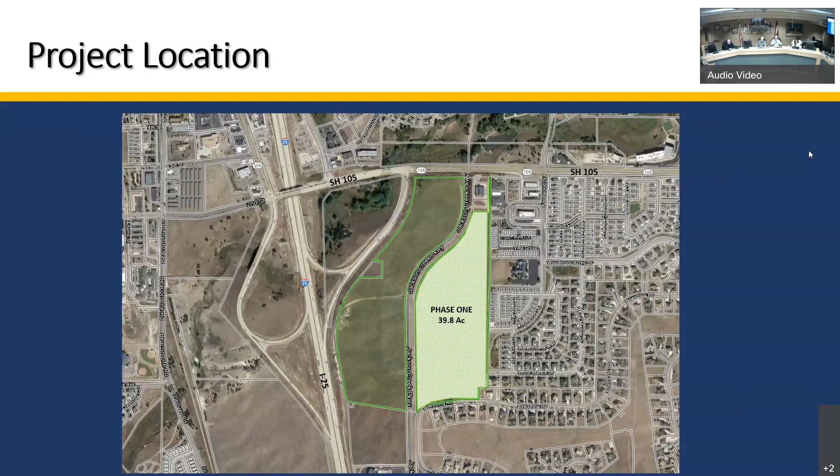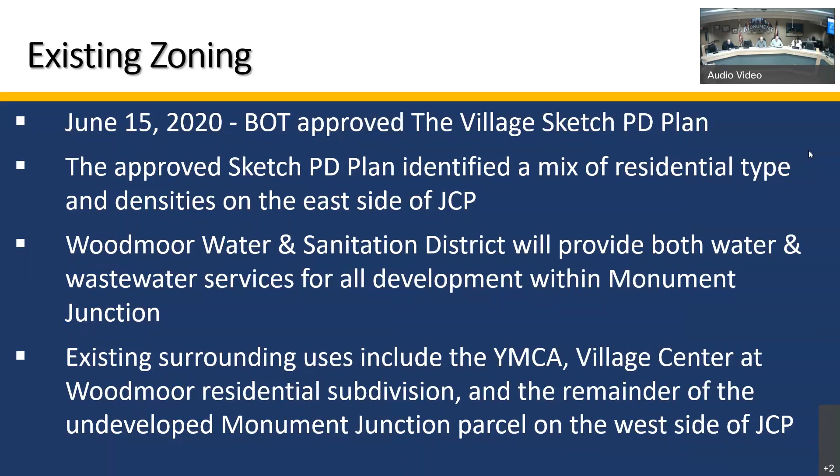On June 15th, 2020, the Board of Trustees approved the Village Sketch PD Plan, which is now Monument Junction. The approved Sketch PD Plan identified a mix of residential types and densities on the east side of Jackson Creek Parkway. Woodmoor Water and Sanitation District will provide both water and wastewater services for all development within Monument Junction. Existing surrounding uses include the YMCA, Village Center at Woodmoor Residential Subdivision, and the remainder of the undeveloped Monument Junction parcel on the west side of Jackson Creek Parkway.

This preliminary final PUD plan consists of 204 residential units. There will be 137 single-family detached lots: in Phase A, Res 1, 12 units; Phase A, Res 2, 46 units; and Phase B, Res 4, 79 units.

These units will be 4-square type homes with shared driveways. Each homeowner will be required to submit a driveway easement agreement to the town. There will also be 67 single-family attached lots in a duplex-type style, for a total of 204 residences.

The applicant provided more park space than the 2.7 acres proposed in the approved sketch plan. They are providing a 3-acre park, 4.4 acres of open space, and 0.95 miles of linear trails.

Residential building heights will be 35 feet. The site is 39.837 acres in size, and there will be an on-site detention pond. Lewis Palmer School District requested fees in lieu rather than land dedication for this project.

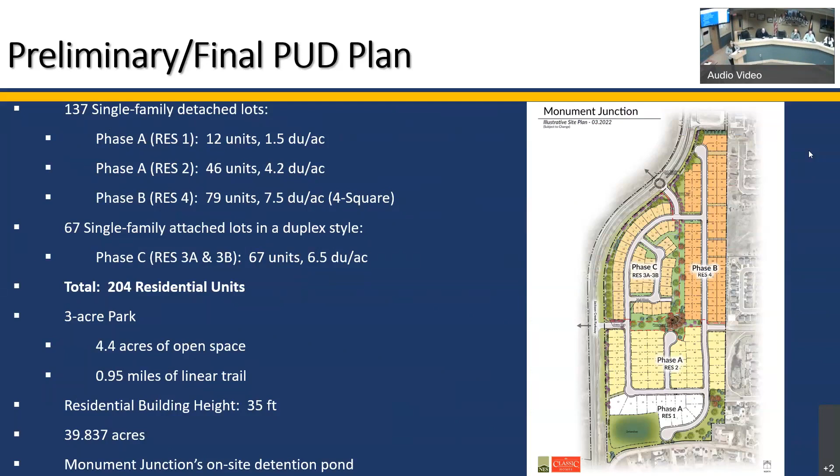Classic Homes will be responsible for the proposed road improvements from Slopeside Street to the State Highway 105 intersection. They will also be submitting a public improvement agreement as surety to the town, which will include the proposed road improvements. The road improvements will be phased.

There will be 3 access points for this project. The first is the required Norwood Drive connection, proposed in the sketch plan. The second access point is Fat Tire Drive, which will be a 2-lane approach allowing a left turn lane and a shared through and right turn lane.

The third access point will be a full movement intersection at Slopeside Street, also a 2-lane approach allowing left turn and shared through and right turn lanes. The town, the applicant, the county, CDOT, and FHU, our design consultant, are all working together on the improvements at the 105 Jackson Creek Parkway intersection.

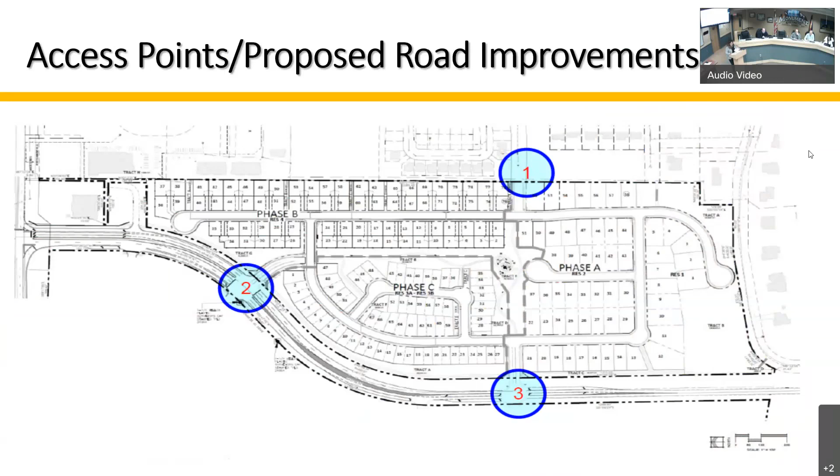Monument Junction Phase 1 is substantially compliant with the town's comprehensive plan and ensures that views, vistas, dark skies, environmentally sensitive areas, and open lands are integrated into the new development. It allows for a wider array of land use types to meet changing community needs, with a variety of residential density types and lot sizes.

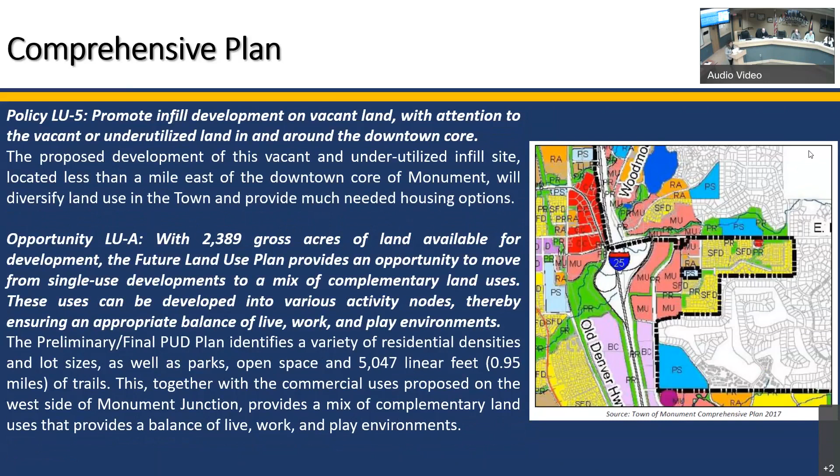It promotes infill development on vacant land. It would diversify land use in the town and provide much needed housing options. It provides a balance of live, work, and play environments, and a connection to parks, open space, and trails.

There will be a centralized park area that will include a play area, a looped trail, and seating. Part of the trail will also connect to Trinity Lutheran Church, where they have a proposed playground—they had a ribbon cutting a few weeks ago for it. It will be for all residents within the town of Monument to enjoy.

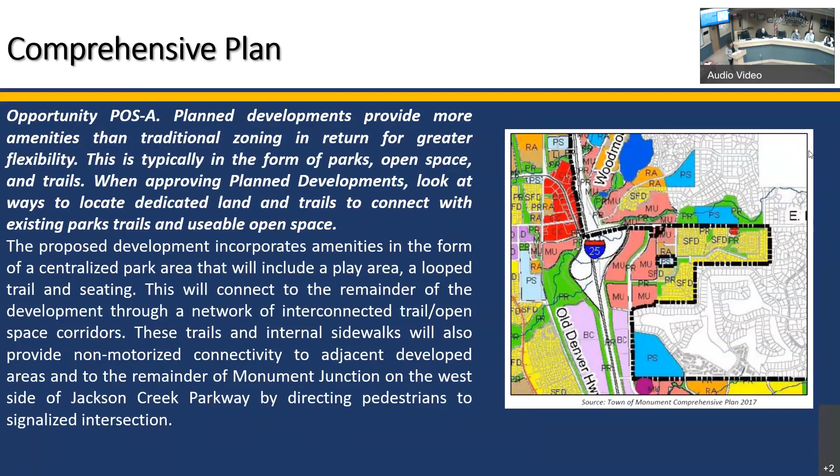The Planning Commission voted 6-0 to approve this project, and staff recommends approval of Monument Junction Phase 1 Preliminary Final PUD Plan, based on findings that the plan is in conformance with the review and approval criteria in the Town of Monument's Land Development Code, sections 18.03-450D and 18.03-460D.

Andrea Barlow with NES is here to present the applicant's presentation tonight.

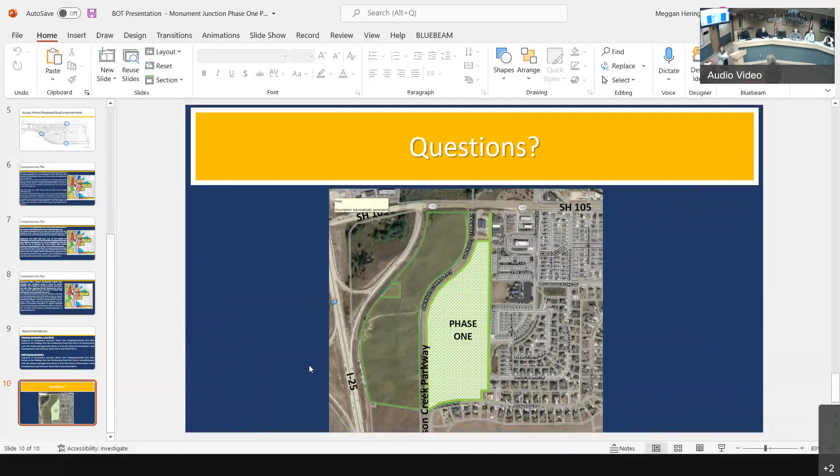Good evening, Commissioners. Andrea Barlow with NES, here representing Classic Homes, who are the developer and applicant. I'll try not to repeat Debbie's information.

I think you've got an idea of the location, just a bit of description of some of the land uses to the east. Particularly, we have Village Estates at the northeast corner of the property, and Monument Villas to the east, as well as the church, then Village Center residential on the east side in the south section of the property, and Woodmoor Greens, which is in the county, on the south side. So we are just looking at the eastern portion of the Monument Junction property, east of Jackson Creek Parkway.

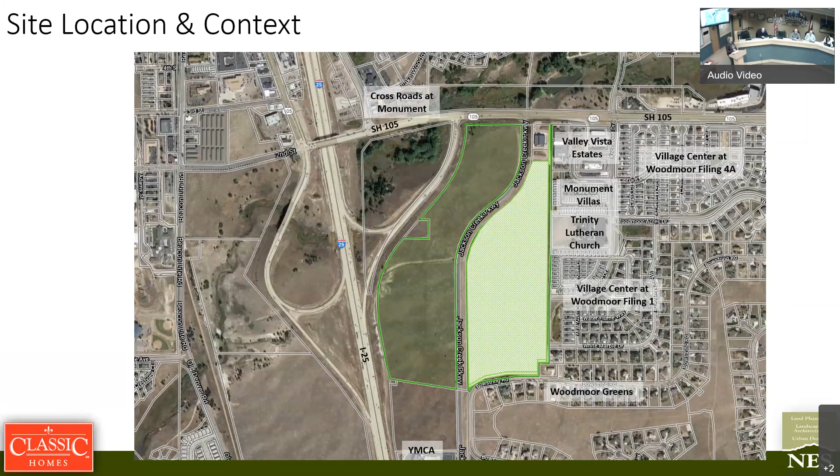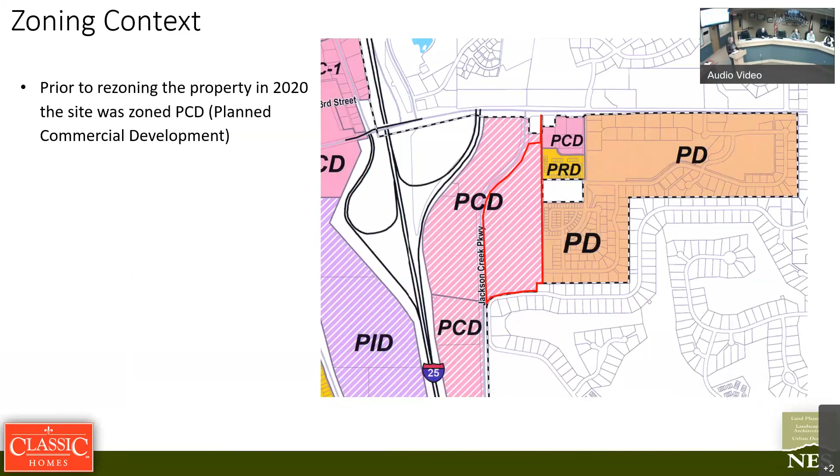Just a little bit of the past zoning: originally, this property was zoned in its entirety PCD, planned commercial development. It did come forward with rezoning in 2015 to all residential, which was denied by the town, wanting to see some commercial development retained as part of the overall development. With the recent change in the zoning code, this has been updated to a PUD—that's just a reclassification. Nothing really changes other than that.

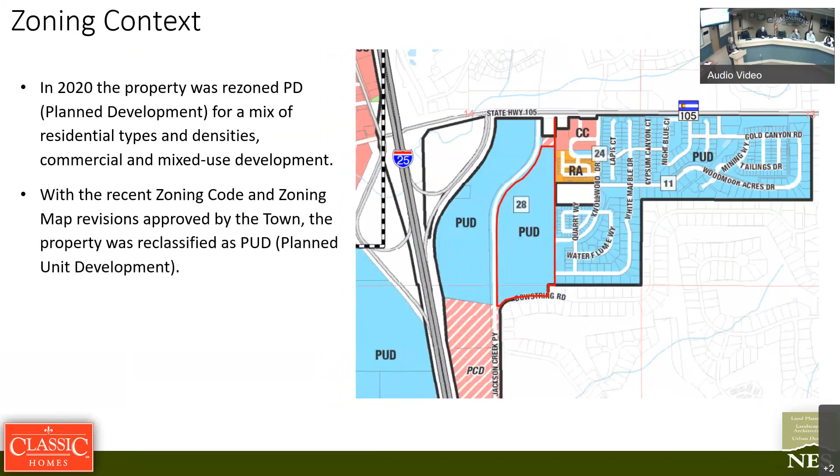The approved sketch plan, just talk a little bit about that.

Again, on the east side, which is the area we're focusing on, it identified a mix of different types of single family residential, detached, attached, or townhomes as possibilities, especially in that northern section. A central park area is there in the green. And then on the south, there was lower density, single family detached, reducing density as we went to the south, with a buffer on the south side.

I'll talk a little bit more about that. The commercial uses and multifamily uses were proposed on the west side of Jackson Creek Parkway. They are not part of this plan today, but they will be coming forward in the future. Altogether in the sketch plan, we had about 14 acres of parks, open space and trails.

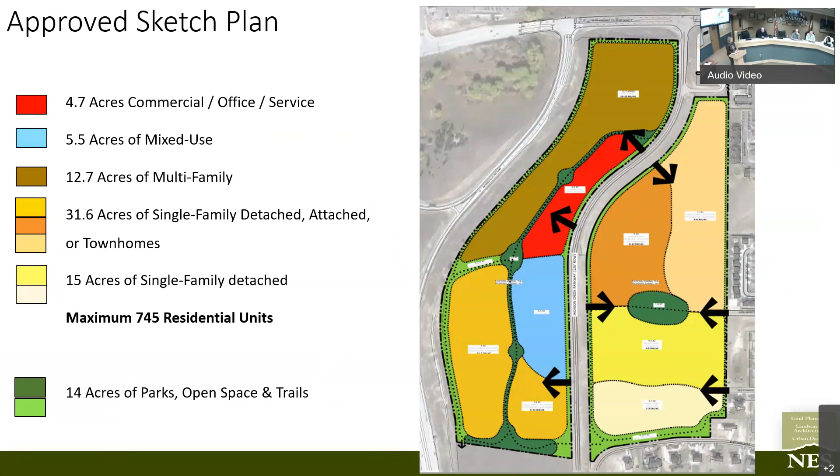So just to focus a little bit on the area that is on the east side. We have areas where, on the south side, the density was 1 to 3 units per acre, which was generally consistent with the 1.5 unit per acre density of Woodmoor Greens. And then as we move north, we gradually increased in density.

So the yellow area is 3 to 5 units per acre, again generally consistent with the village centre development to the east. And then moving forward into that lighter peachy colour area, that was 5 to 8 units per acre, and then a higher density adjacent to Jackson Creek.

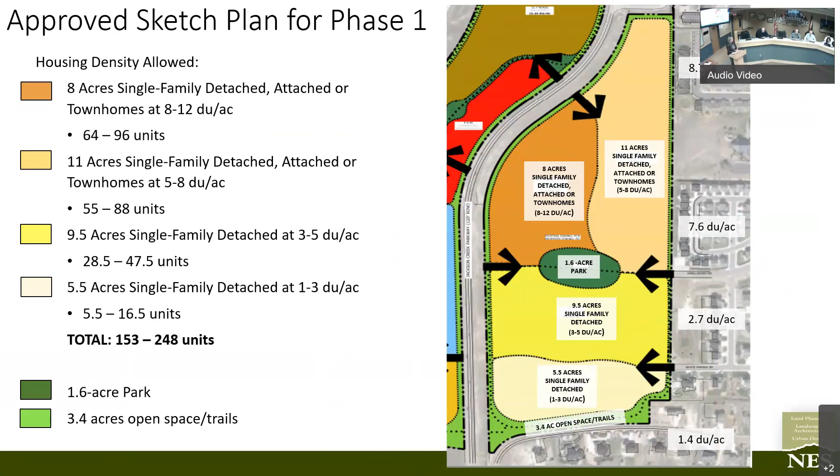In this plan on the east side, we propose a 1.6 acre park, the green area in the centre, and then 3.5 acres open space and trails around the perimeter and on the south side.

So this is the plan we have before you today. We have 3 different types of development, all residential with different densities. On the south side of Phase A, in white, is an area that is lower density at 1.5 units per acre. And then moving up into the yellow area, still part of Phase A, is 4.2 units per acre.

On the east side, we have a higher density single family detached product, coming in at about 7.5 units per acre. And then in Phase C, it's an attached product, single family attached, 2 units attached with a common wall, at 6.5 units per acre.

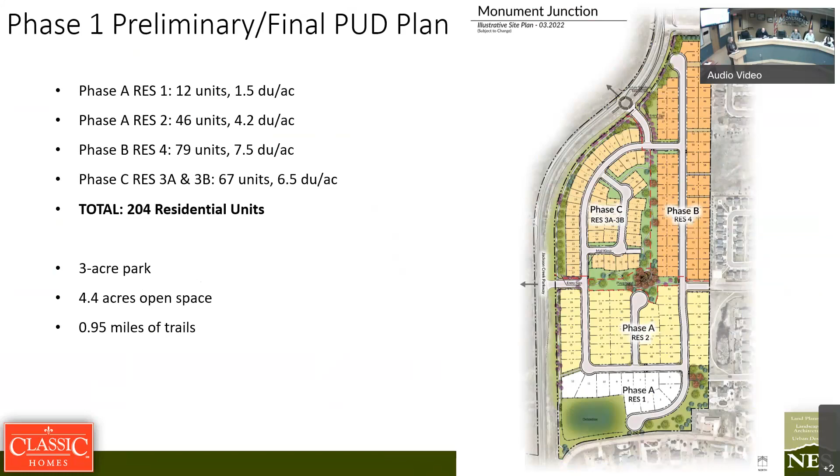A total of 204 units on this parcel, and we have a 3 acre park, centralized but elongated in the middle, between phases B and C. We also have 4.4 acres of open space and trails around the perimeter, and almost a mile of trails.

So a couple of things, looking at a comparison between what the sketch plan approved and what we're proposing today. On the south side of Phase A, we have 1.5 units per acre, as I noted, in an area that was identified as 1 to 3 units per acre. So we're right in the middle there.

Phase A, the second portion of it in yellow, we're at 4.2 units per acre, which is within the range allowed on the sketch plan. Similarly, Phase B is within the range allowed, and actually Phase C is a little less. We had a range of allowed residential units on the sketch plan from the low end of 153 up to the high end of 248. And we are coming in now with this preliminary final plan at 204 units, so right in the middle of what was allowed.

We are actually providing a lot more park space than was originally anticipated, almost double, and more open space and more trails.

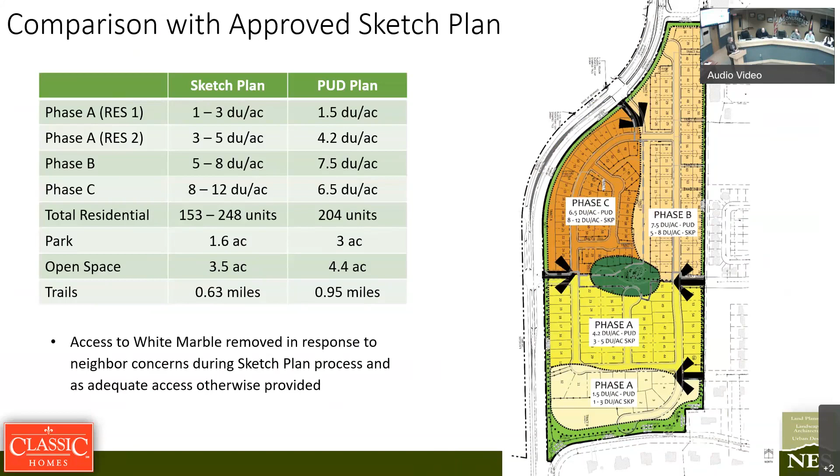That was fairly contentious with some of the neighbours in that area at the time. It is much more of a residential street, whereas Knollwood is a collector with no direct lot access off it. With reviewing the plans, we decided that not only did we not need that access to service the southern part of the development, but that it would be a better relationship for those neighbours.

So this is going to start talking about traffic a little bit here. A comparison between what was originally zoned for commercial, what the traffic would have been versus the approved sketch plan, and what we're proposing today.

For the entirety of Monument Junction, if you'd taken commercial zoning across the whole site, you'd be looking at almost 18,000 trips a day. With the approved sketch plan, that was reduced to just over 7,000, and the currently planned uses are a little more than the sketch plan anticipated, but in that ballpark—just slightly different uses now anticipated, primarily on the west side. The original commercial zoning on the east side would have been 10,700 trips a day, and we are significantly reducing that, to only just over 1,900. So traffic generated on the east side is significantly less than with that prior commercial zoning.

And that was a point we made when we rezoned the property and got the sketch plan approved last year.

So description—Debbie touched on some of these, I'm just going to go into a little more detail. First, some overarching aspects of the proposed road improvements, then more detail on what's been proposed. There's a plan to widen Jackson Creek Parkway north of Higby Road all the way to 105. This overall plan is the responsibility of the town, and the design is underway, so the town is taking responsibility for that overall design.

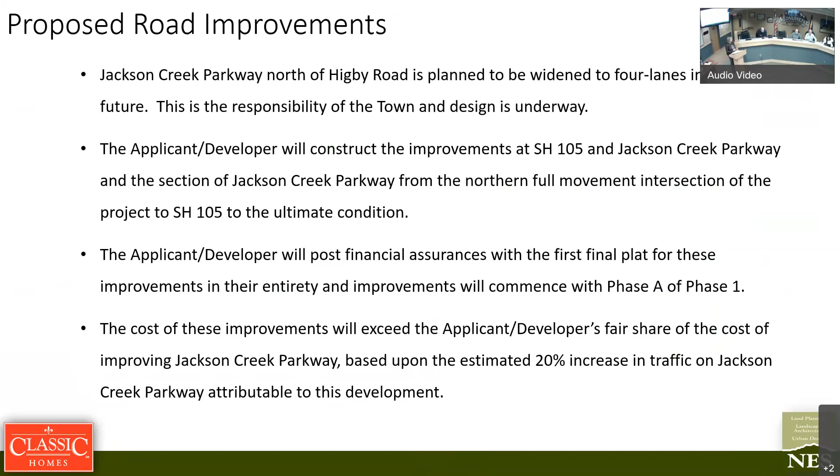So describing those improvements in a little more detail—I'm sure you're all very familiar with this intersection, so hopefully it will have some context for you.

The first improvement requested, probably the primary one from CDOT particularly, is as you go eastbound on 105 and turn south on Jackson Creek Parkway—they've asked for a deceleration lane and a free right turn at that point, so you'll be able to turn freely rather than currently being stuck behind traffic going straight on. There will be a free right turn to go south.

Also in the northbound direction, that will change to a dual northbound left turn lane—two left turn lanes going north onto 105 in a westerly direction. The right turn lane will also be extended. One of the problems now is there's a right turn lane, but it isn't long enough, so it gets blocked by traffic turning left and backs up. So we're extending all those lanes south and introducing a dual northbound left turn, which will significantly improve traffic flow in that direction.

In addition, we'll be providing a southbound right turn deceleration into the first access point on the west side of the project. Then on 105, the westbound approach at the signal will be restriped to accommodate dual westbound left turn lanes, so as you're coming along 105 to Jackson Creek Parkway turning south/left, there will now be two left turn lanes to accommodate those turning movements.

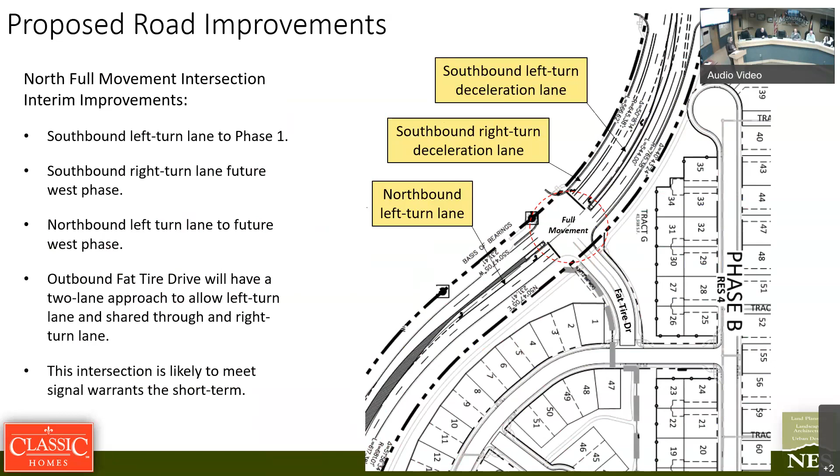So all these improvements will be interim until the road is widened in that southern section. So that's all the traffic improvements.

Moving on to the comprehensive plan, Debbie addressed this in detail. I just want to emphasize that the site is identified as mixed use on the comprehensive plan future land use map. The sketch plan that was approved was found to be consistent with that designation and various other policies in the comprehensive plan, which encourage mixed use and a variety of land uses. We do have the mix not only of different types of residential densities, but also commercial uses, as well as some more civic uses proposed.

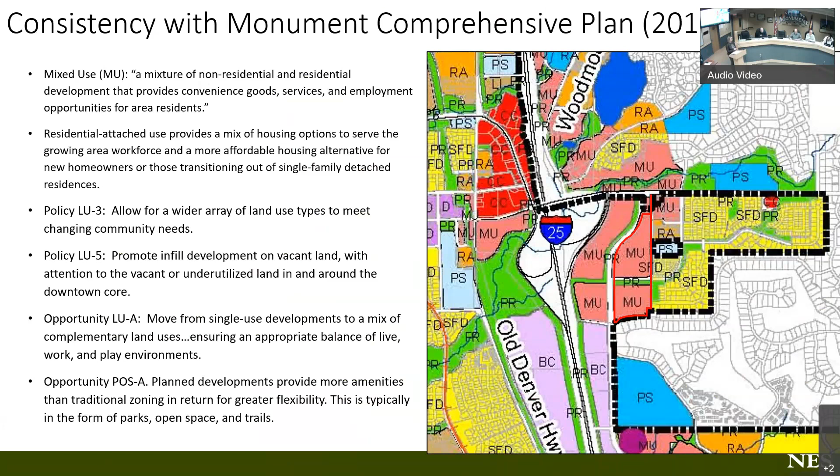So the review criteria - as this is a preliminary plan and a final plan combined, there are a lot of review criteria. I haven't tried to list them all here. Some of them are more objective, like are utilities available? Is water available? Water here will be served by Woodmoor Water and Sanitation District, and is there adequate access, and so on. I've focused a little bit more on the subjective ones.

We've already talked about consistency with the comprehensive plan. We are providing what we believe to be quality and functional parks, open space and trails. The whole area is connected with a trail system. The parks are consistent with what was proposed on the sketch plan. They will have park facilities to service the residents, and everything's going to be owned and maintained by the Metropolitan District, meaning everything will be publicly accessible.

And there are appropriate use-to-use relationships. We were very careful when we did the sketch plan to make sure that the densities progressed in the same manner as the development to the east, and we've matched that with this plan. So we feel that the densities and the overall type of residential is consistent with the differing types of residential to the east. We looked at the circulation system, as noted.

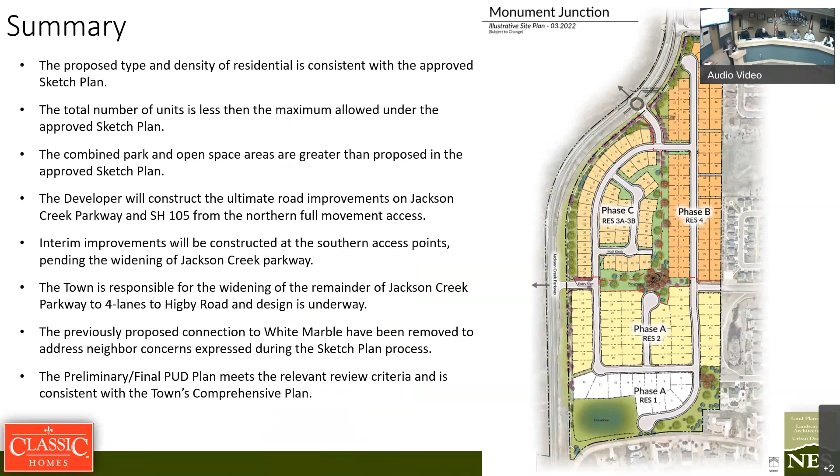Okay, at this point, we will open the public hearing portion of this item. Mr. Wychulis, do we have anybody online wanting to comment? Okay, do we have anyone here tonight that would like to comment?

Nancy? Nancy Swearingen, 418 Trailhead Road.

My question is, and maybe you can't answer it since the town is working on the widening of Jackson Creek, but it would seem to me that one of the ways to alleviate some of the traffic would be to provide both sidewalks and bike paths to get people to the different areas like Walmart down the way, Home Depot, and all of that. So I was wondering, in the widening of Jackson Creek, was there any provision for bike lanes and sidewalks? Thank you.

Thank you. Mr. Kimple? Good evening, Kenneth Kimple, 16151 St. Lawrence Way.

To answer Nancy's question, yes, in the El Paso County Development Plan, it is required for the sidewalks, bike paths and stuff like that. So if you'd like to see it, I have it here.

First, everyone knows that there's known traffic concerns on Jackson Creek Parkway. This has been talked about with its traffic issues for many years, even when I was back on the Planning Commission. Well, prior to this proposal, developments all around the area have caused increased traffic from multiple areas utilizing Jackson Creek. The town does not have the funds to complete the expansion project north of Higby Road.

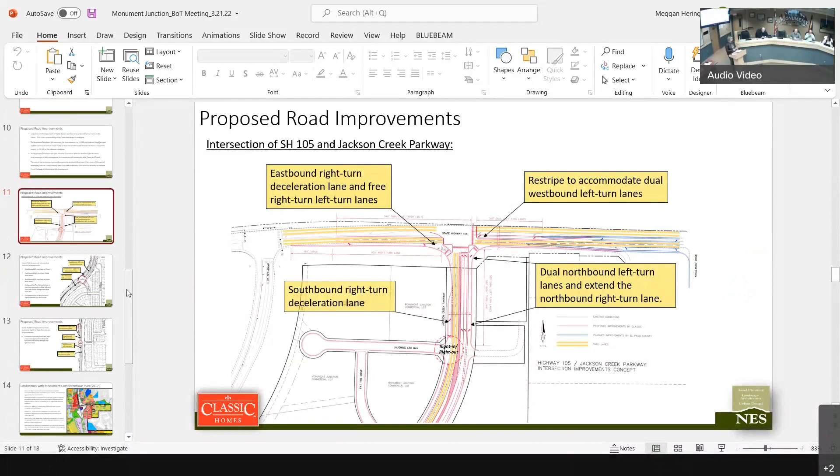While Meggan is pulling that up, I'd like to clarify, to the lady's first question, the section for Jackson Creek Parkway does include sidewalk and bike lanes. As part of our development, we are proposing a sidewalk along the western edge of the development between the residential area and Jackson Creek Parkway within a landscape tract, so there will be connections for this development throughout.

So just to talk to the intersection - everything you see here, all the improvements identified, are going to be constructed by Classic Homes as part of their first phase of development, and they will be putting up the financial assurances with phase A of this first phase. These improvements are more than is required to accommodate the traffic generated from this phase, potentially even more than the full build out of this development would require. So some of them would have been triggered at some point, but they're far in excess of what's required to support this development. In terms of Mr. Kimple's comments about not developing the site until all the improvements of Jackson Creek Parkway from Higby are installed, that seems unreasonable, given that the majority of the traffic on the road now, plus the traffic added by this development, would not warrant more than what we're proposing today.

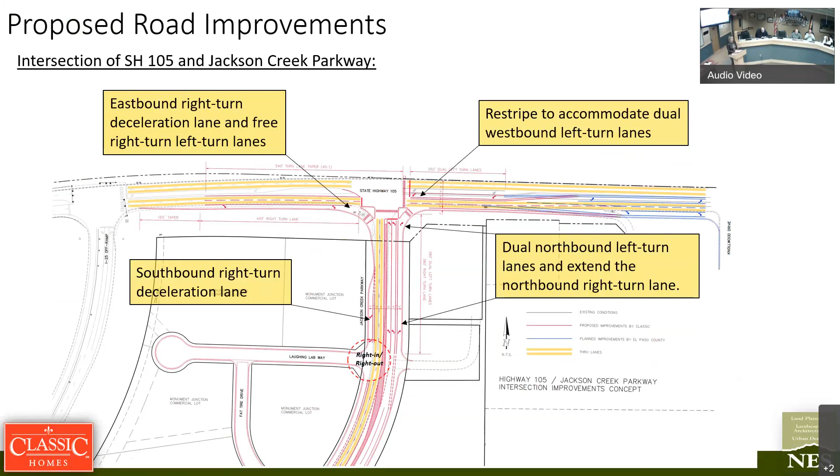So these are full build out improvements. I do want to clarify - Meggan, if you can go to the next slide, one that shows the entire development.

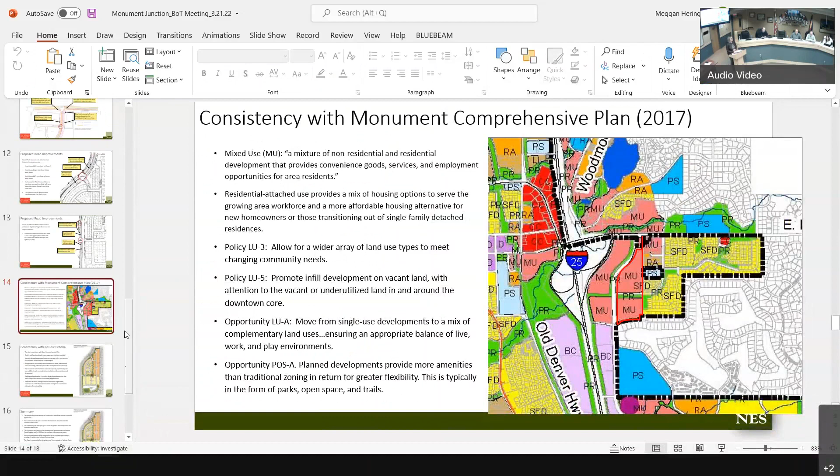So the circle, it's small scale, but there's a circle at the north end there - that's the first full movement intersection, Fat Tire Drive. From that point north to Highway 105 is a section that Classic is completing to its full intersection and ultimate conditions - the ultimate width, the ultimate lane configuration from that intersection to Highway 105.

South of there, there was some suggestion that it's from the south boundary of the property - that's not the case. South of there will be interim improvements to provide the necessary turning lanes to get in and out of the development on both sides, but the ultimate widening to its final condition will be part of the town's project.

I just wanted to clarify that, so there's no confusion, that Classic is doing everything adjacent to its development to the full condition. That's not the case. I wanted to talk about the traffic study.

Mr. Kimple is correct. The traffic study was originally submitted in June 2021, with traffic counts performed that month. It was then updated two more times with more recent traffic studies counted in October and November of 2021, specifically to take into account school traffic and to measure traffic during school times. Those were rolled into revisions to the traffic impact study, submitted to the town and presumably on the town's website.

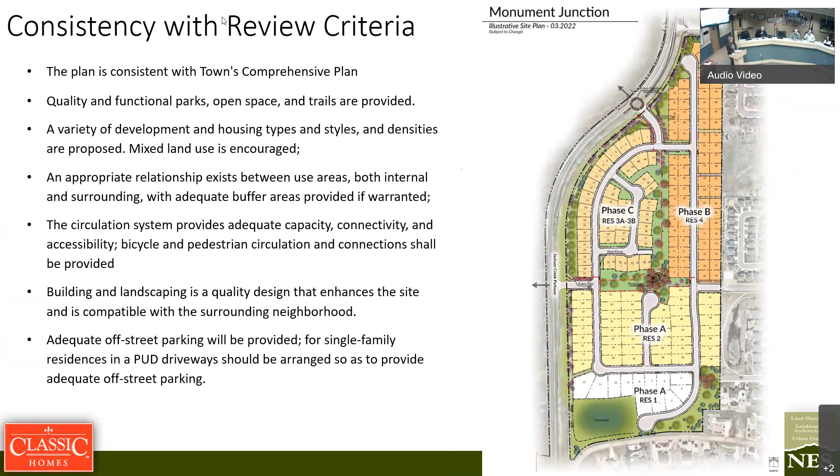Those are my rebuttal points. I think they were mainly traffic and the sidewalk, so unless you have any questions for me. Any additional questions for the applicant? Thank you, okay.

At this point I'll bring it back to the board for further discussion or a motion. Well, I think with Mr. Foreman's high degree of certainty that we'll be getting funding, I see no reason to delay this because of the issue with the widening. I think we're on track, and delaying would slow things down.

So I move resolution number 21-2022, a resolution approving a preliminary final planned unit development for Monument Junction Phase 1. Second. We have a motion and a second. Ms. Hogan, will you take roll, please?

Trustee Shaning? No. Trustee LeKind? Yes. Trustee Stevens? Yes. Mayor Wilson? Yes. That motion passes... excuse me, 3-1.

Item number 5B, resolution adopting a Town of Monument 3-mile plan. Ms. Harrington.

Good evening, Mayor, trustee members. For the record, Megan Harrington, Planning Director. I don't have a PowerPoint presentation this evening because this is a pretty simple request. State statute requires that the town update the 3-mile land use plan annually. Our 3-mile land use plan is actually the annexation growth map from the comprehensive plan. Annually, the town should document the annexations that have occurred within the year and add those annexation areas to that map, which is included in your packet. The item before you this evening is a resolution to do exactly that.